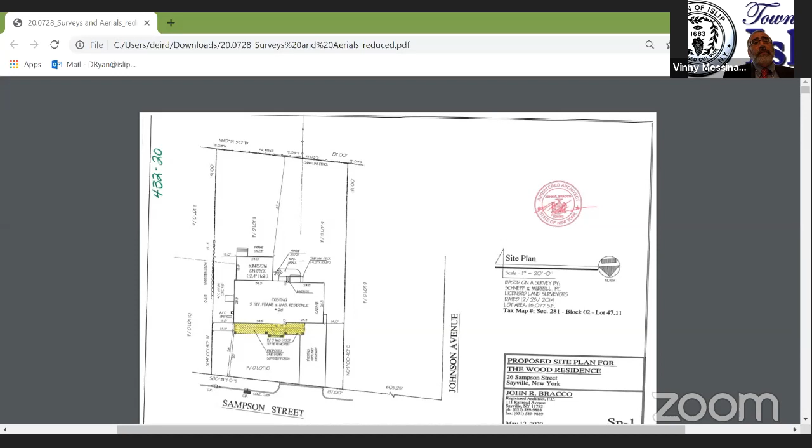All right, is anyone from the public here on this? There being no one, I'll entertain a motion. Anyone? Don't be bashful, don't be shy. Motion. Is there a second? Second. All in favor? Aye. Opposed? None. Application granted.

Thank you. Which other application do you have, Ms. Trella, since you're here? 436-20. All right, we'll call that next then.

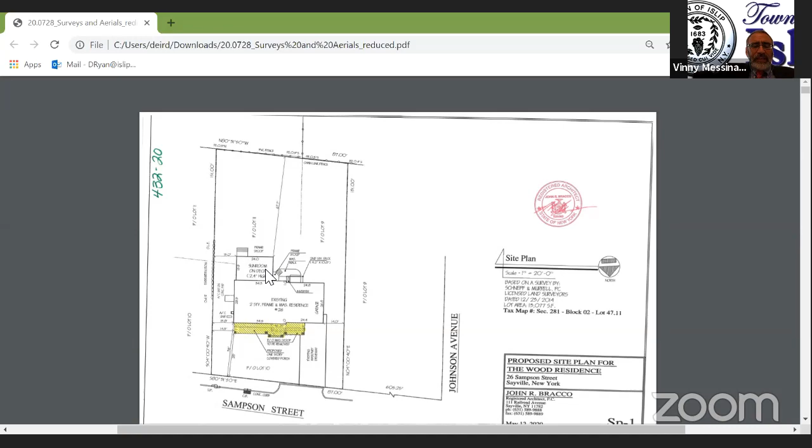436-20, Feliciano A. and Julia Solsa, to renew permit for two-family, family use only, Residence B district, east side of Pine Grove Boulevard, number 1723, 260 feet north of Benton Place, Bay Shore, New York.

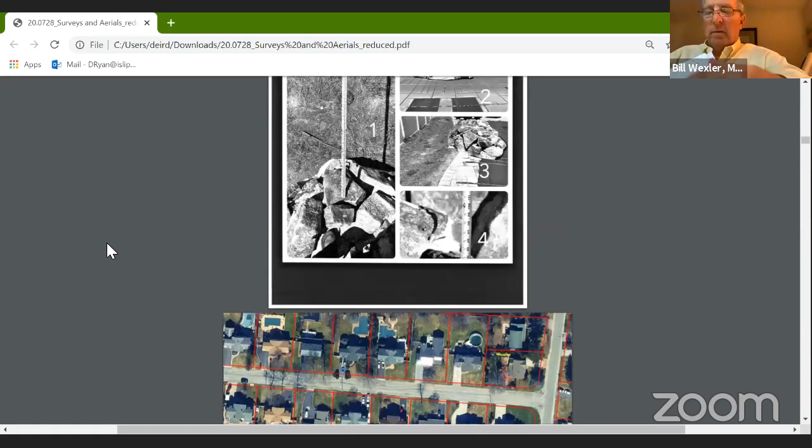Please state your name and address again for the record. Roxanne Trella, Dynamic Expediting, with offices at 1040 Terry Road, Ronkonkoma, New York, agent for the applicant. Thank you very much, the floor is yours. Renew the permit for two-family, family use. It's the same, we did provide a license and it's based on age.

Okay, Ms. Passaro, everything in order? Everything's in order. All right, Mr. Nicolia, would you like to make a— oh, I'm sorry, planning, do you wish to be heard? No. Anyone from the audience wish to be heard? Mr. Nicolia, do you wish to make a motion?

Motion to grant the application for a period of 3 years. Second. Thank you. All in favor? Aye. Opposed? Motion carried unanimously.

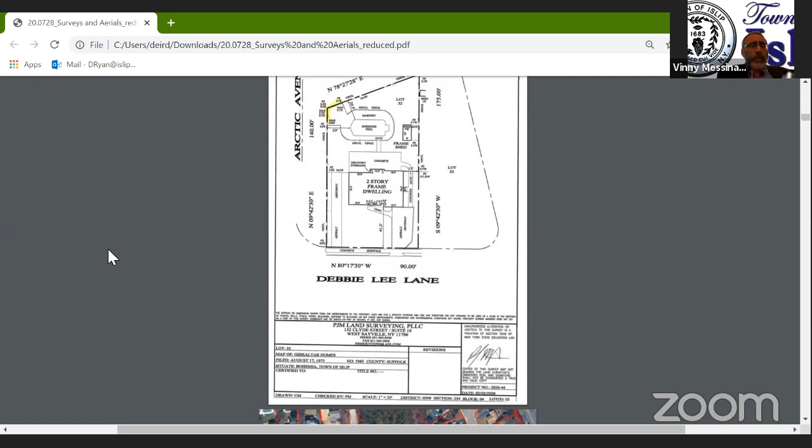Number 435-20, Helene Larson. Permission to leave water feature having a side yard of 6.2 feet instead of the required 14 feet, Residence A District, south side of Hollister Lane, number 16, 270 feet west of St. Mark Lane, Islip, New York. Is there anyone here for the applicant?

Can you hear us, Ms. Larson? She's here. Moved her in. I can't wait for live hearings to resume. I know. Let's see, maybe she's writing to me. Oh, she's writing to me. She's having trouble. We are trying. I saw that. Okay.

Tom from IT is telling us that it looks like maybe you don't have a microphone, Ms. Larson. So what you can do is call us on one of the phone numbers from your house phone. There are 3 phone numbers listed on the town website, right where the Zoom link was listed. When I see a phone number come in, I can convert it to you and move you in as a panelist. Ms. Passaro, which do you prefer, that we second call this or just take the next application and come back to it, or continue to hold for this? I'm just going to ask her real quick. Can you call? Then we'll do a second call. Oh, they're trying, can no longer hear the meeting. All right, we're gonna put this then. We'll recall this when they're back. I'm going to keep communicating with her here.

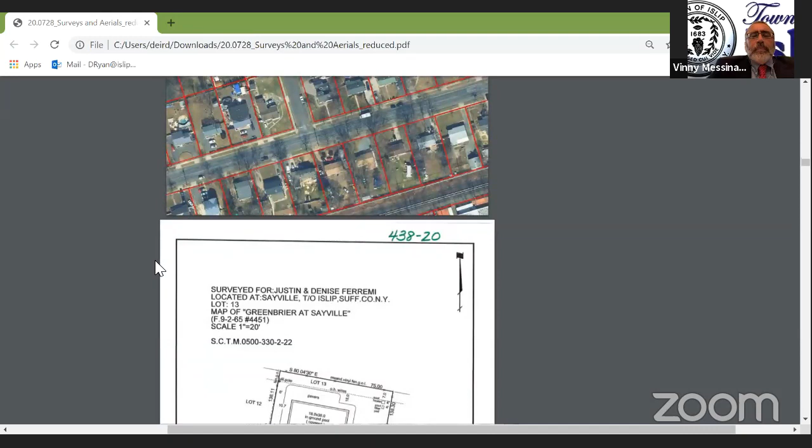Okay, the next application on the top of page 2 has been heard or adjourned. Next application, number 438-20, Justin and Denise Ferremi. Permission to leave patio having a side yard of 1 foot instead of the required 14 feet, Residence B District, north side of Joseph Street, number 73, 445.14 feet west of Lincoln Avenue, Sayville. Is there anyone here for the applicant?

I'm looking, I think I saw that name before. All right, do we not have anyone on this application either? Well, nobody is talking to me in the chat or the Q and A, and I don't see a Justin or a Denise. Fine, second call.

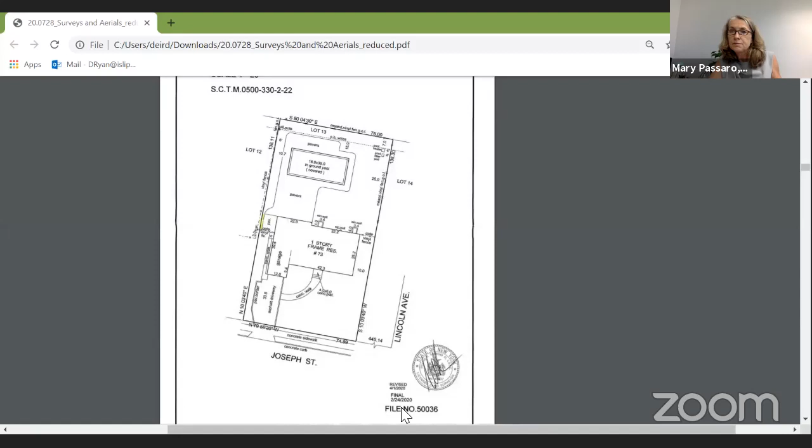Next, application number 439-20, Suffolk Real Estate Solutions, Inc. Permission to alter and repair the roof line, leaving a side yard of 9 feet instead of the required 14 feet, and the total side yards of 24.6 feet instead of required 28 feet. Residence B District, east side of Charter Oaks Avenue, number 147, 225 feet south of Jericho Street in Brentwood. Is there anyone here for the applicant?

He is here. Finally. Hello, can you hear me? All right, sir, state your name and address for the record, please. Michael Mendocino for Suffolk Real Estate Solutions, 20 Beechwood Drive, Manorville, New York, 11949.

All right, sir, are you a principal or a member of the company, or do you have a title with the company? Sole Principal President. Thank you so much, sir. All right, anything you would like to say about your application? I'd be glad to give you anything you want to know, and I agree with you, I like to do this in person. I'm not technology savvy, but it's working. All right, there we go.

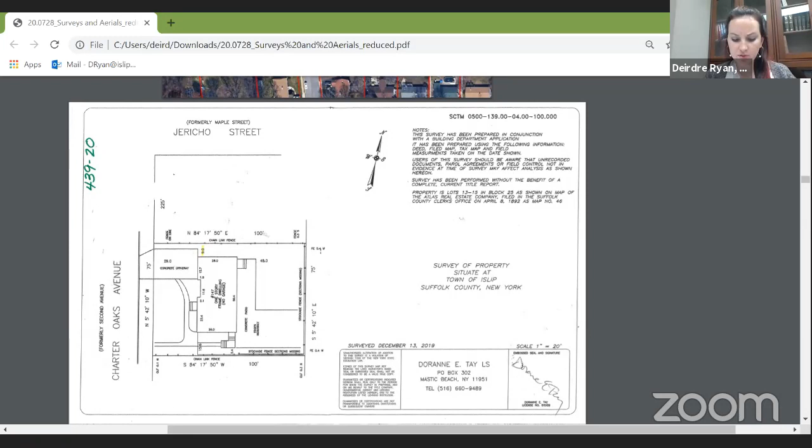Planning, do you wish to be heard on this application? I just had a question. The roof line, I was a little confused by it. Did it always have the 9-foot side yard?

So I thought that might be confusing for you. Nothing changed - if you go to the CO and lines on the survey, they're the same. There was a stop work order when I bought the property as a foreclosure. The people living in the house had a tree that crashed through the garage. Upon buying it, I pulled the tree out, restructured the rear wall for the garage, and evened off the roof line. So there is no actual extension on the property - it just takes the roof line from the beginning of the garage to the house now, so it's even. There is no extension beyond what was already there, just an evening of the roof line, if that makes sense.

All right, having heard that, Ms. Ryan, any other questions? No, that was it, no objections. I just wanted to make sure there was no extension. Sure. Does the board have any questions?

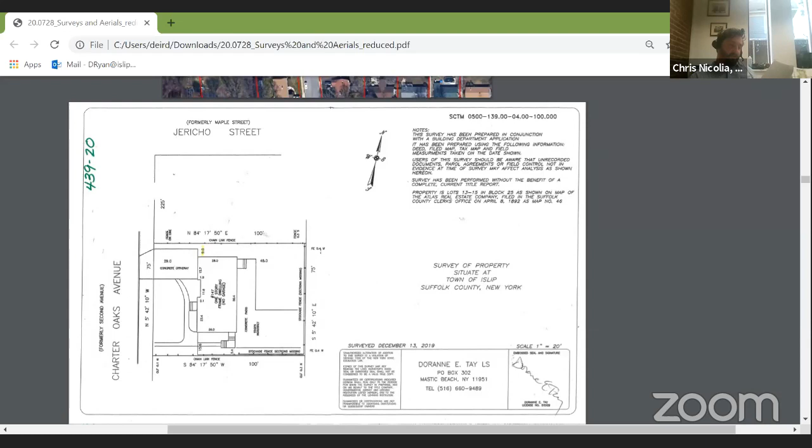Is there anyone from the audience that wishes to be heard on this application? There being none, I'll entertain a motion. Motion to grant the application. Second. All in favor? Aye. All right, application granted. Thank you, sir.

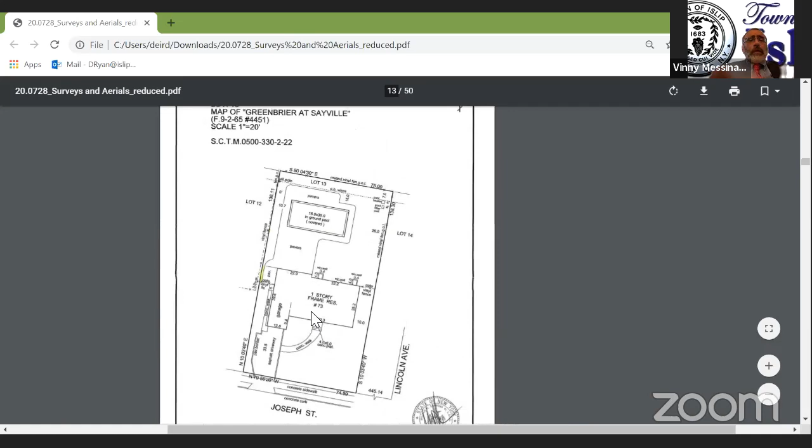Folks, thank you for your time. Do we have anyone back, Ms. Passaro? We do, we have application number 3. The Fishers have arrived. What number is that? 434, okay. This is a recall, application number 434-20, Virginia and Robert Fisher.

I'll read the call again for the convenience of the board members and the public. Permission to leave pool patio having side and rear yard of 0.7 feet instead of the required 6 feet each, Residence AA District, north side of Debbie Lee Lane, number 102, approximately 75 feet east of Arctic Avenue in Bohemia.

Whoever's here for the applicant, name and address for the record, please. Hi, how are you? Virginia Fisher, 102 Debbie Lee Lane, Bohemia.

Okay, if there are two of you in the same room, we're getting feedback, so one of you needs to turn off your computer, or if you're watching live on YouTube, I believe you need to turn that off as well. Okay, there you go, sorry. All right, that's better. I just want to hear every word you have to say, it's all important, so go ahead, anything you'd like to say about your application? Oh wait, did the reporter get her information? I did, thank you. Okay, very good.

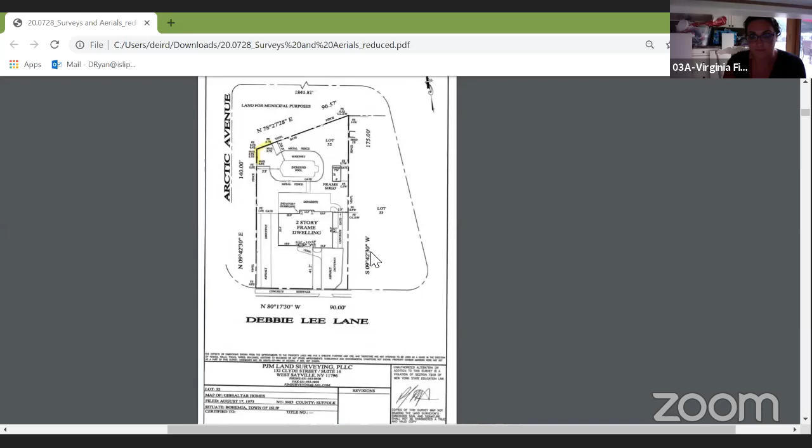Ma'am, anything you'd like to say for your application? No, there isn't. Okay, planning, do you wish to be heard on this application?

This is 434, sorry, I just wanted to check. Correct. So all I want to say about this one is, although it's just in this small corner, it seems very minimal effect. Based on the aerial, it backs up against Town of Islip owned property, so there's not a neighbor there that might be affected by it. That's pretty much it, no objections.

Does the board have any questions? Hearing none, is there anyone in the audience who wishes to be heard on this application? All right, there being none, I'll entertain a motion. I'll make a motion that we grant the application. Second. All in favor? Aye. Opposed? None. Application granted.

Thank you very much, Ms. Fisher. Have a great day. You're very welcome. Bye.

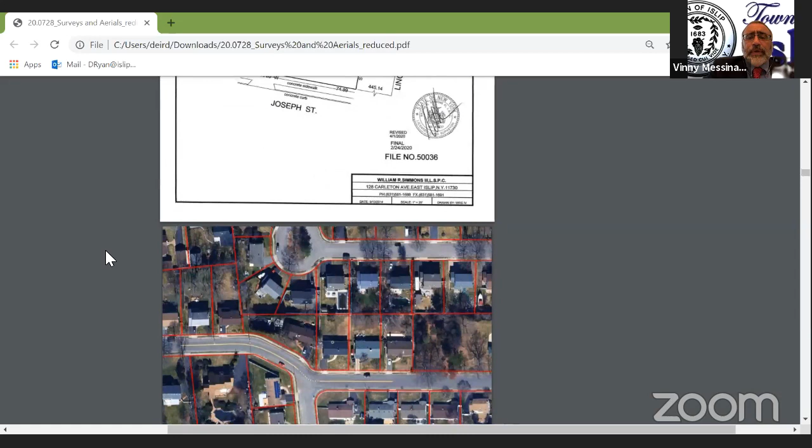Next application, number 440-20, Robert LaMonica, permission to leave deck 2.8 feet high, having a second front yard of 40.21 feet instead of the required 50 feet, and to leave the accessory structure 6.4 feet by 8.8 feet, having a second front yard of 37.21 feet instead of the required 55 feet. Residence AAA District, 278 Cluster, south side of Blue Point Road, number 216, corner of Bayview Drive, Oakdale, New York.

Is anyone here for the applicant? Oh sorry, I was busy. The other person had arrived also after that person, but let me get LaMonica. Okay, we'll work through it. Okay.

Hi, everyone. Name and address for the record, please. Amy DeVito, Woodhull Expediting, with offices at 1031 Main Street, Port Jefferson, New York.

Thank you, Ms. DeVito, the floor is yours. Good evening, Mr. Chairman and members of the board. The only thing I'd like to add to this application is that although these structures do encroach in the front yard, they are fairly far away from the street and not creating any obstruction.

I'm sorry, you're going to have to repeat that, we had some interference there. I heard you, apologize. It's okay.

I said the only thing I wanted to add was that although these structures are located in the second front yard, they are substantially far away from the street and any moving traffic, not creating any obstruction to moving traffic. The house was built as part of the cluster and was actually one of the smaller lots, so it doesn't leave much room due to its unique lot shape to put really anything in the backyard without encroaching. I did speak to Deirdre earlier, and I know that she did find a comp just across the intersection to the north of this property with very similar relief, actually more intense relief than this. I'm happy to answer any questions.

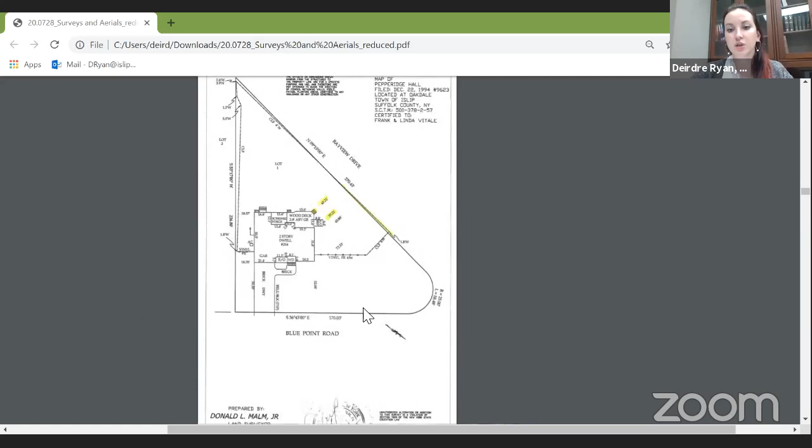Just like Ms. DeVito said, there's a precedent for a second front yard of 21.5 and a stoop having a second front yard of 20 feet. So this doesn't seem like it's a great impact on the neighborhood. It seems like it'd be fine. And again, the lot shape is very strange, even on the aerial it's just a strange area. So no objections.

All right, thank you. Anyone in the audience wish to be heard on this application? There being none, Mr. Sullivan, I'll entertain a motion. I'll make a motion to grant the application. Is there a second? Second. All in favor? Aye. Opposed, none. So carried, congratulations, application granted.

Thank you very much. Thank you. I'm here for the next case too. Oh, look at that. Would you mind if we go back and get the simple one we skipped over in the beginning? Sure. And Mary, Ray Snyder from Fusion Architecture is here with me. Thank you, good to know. Okay, all right, we'll get right back to you then.

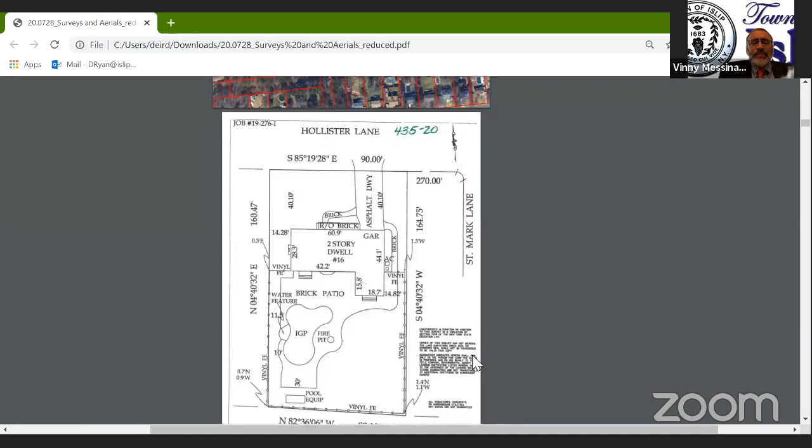Which application would you like to recall? That is the application of Helene Larson, number 435-20. All right, I'll recall it. Number 435-20, Helene Larson, permission to leave a water feature having a side yard of 6.2 feet instead of the required 14 feet, Residence A District, south side of Hollister Lane, number 16, 270 feet west of St. Mark Lane, Islip. Is there anyone here for the applicant?

I promoted her to panelist. All right, I'm asking her to start the video. Ms. Larson, the floor is yours. Ms. Larson? Let's see, Ms. Larson's on the phone. Ms. Passaro, can you patch her in? Oh, I wonder if she's here.

I'm on mute. Oh, I think we have her. All right, Ms. Larson, good evening everybody. Hello, how are you? Helene Larson, finally. Yes, finally. You state your name and address for the record, please. Good evening, I am Helene Larson, my address is 16 Hollister Lane, Islip, New York.

All right, thank you so much. Is there anything that you'd like to say about your application? Not really, just we'd like to leave our water feature.

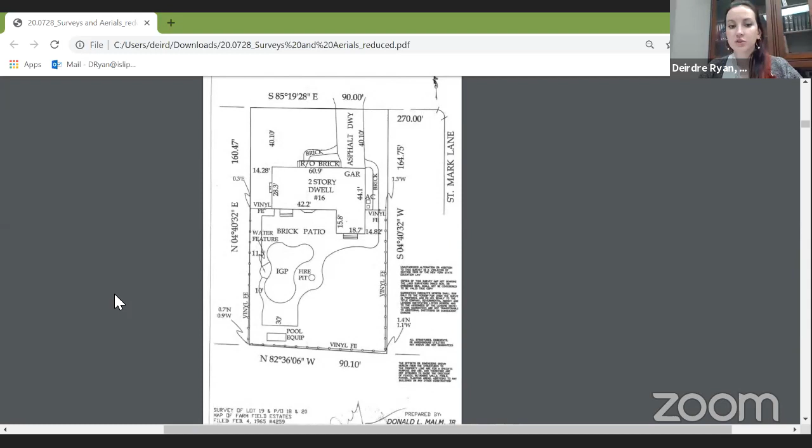No objections. It bumps out a little bit at a small area, and it seems like the height is minimal as well. Okay, does the board have any questions? There being none, does anyone in the audience wish to be heard on this application? There being none, Mr. Wexler, I'll entertain a motion.

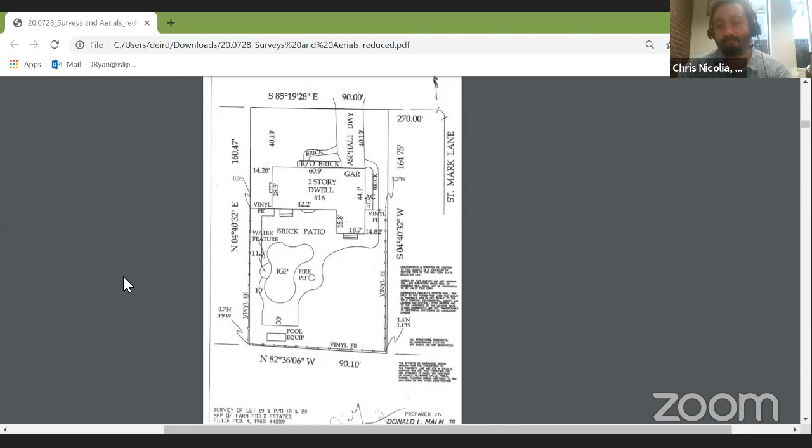Thank you, Mr. Vice Chairman. I make a motion that we grant the application. Second. All in favor? Aye. Opposed? Application granted. Thank you, Ms. Larson, and thank you for your diligence in trying so hard. Thank you, guys, have a great day. You too.

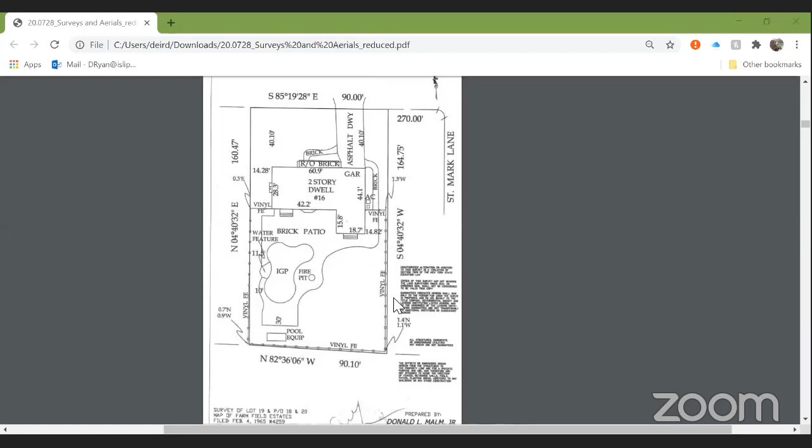Okay, so now we're back to application number 441-20 on page 2 for the board's convenience of the agenda. Town of Islip Community Development Agency, United Way of Long Island, permission to erect a one-story dwelling with a porch on a lot having a width of 50 feet instead of the required 75 feet, lot area of 6,231 square feet instead of the required 7,500 square feet, leaving side yards of 12 feet and 11.85 each instead of required 14 feet each.

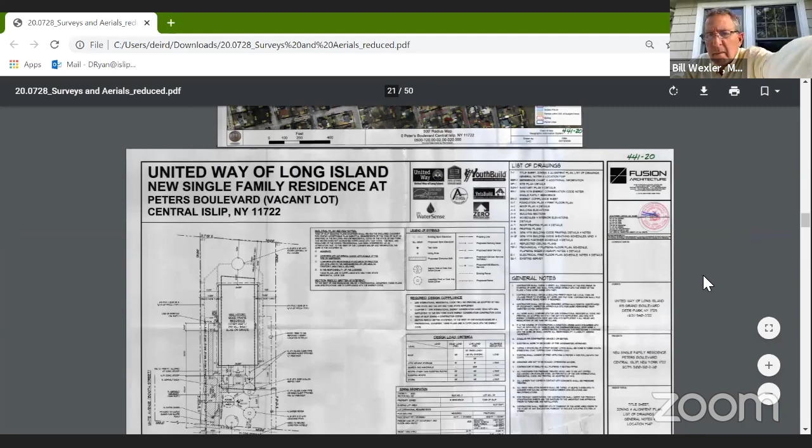Total side yards of 23.85 feet instead of the required 28 feet to erect a portico, leaving a side yard of 9.5 feet instead of required 14 feet. Residence B District, east side of Peters Boulevard, approximately 200 feet south of Booth Street, Central Islip, New York.

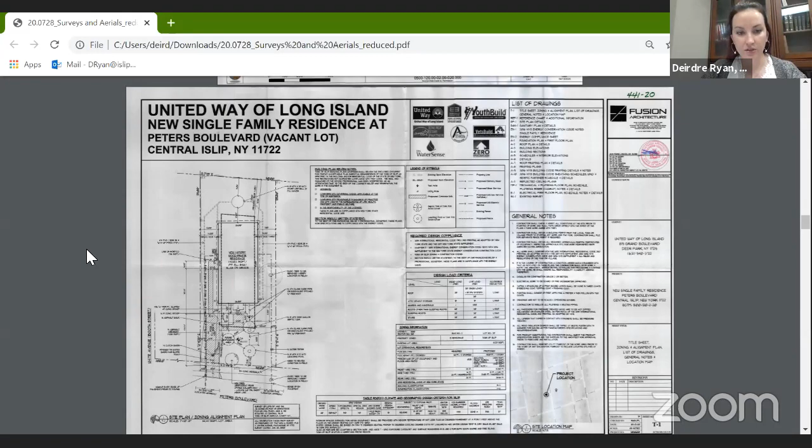And there's a lot of 2-story dwellings in this area as well that ask for a side yard of 10 feet. This is a 1-story dwelling, so I think it won't impact the site as much. I did actually look into the map that they supplied, showing the radius and the 87 homes or parcels mentioned. Sorry, you're breaking up on us, Ms. Ryan. Hello? There you go. Okay.

Out of the 87 parcels within the 500-foot radius, 19 are actually 50-foot lots, so that's about 22%, I think, when I did the math. And even ones that are below 75 feet, there's about 30% of the lots in the area that are below 75. So I believe this would be more so in the nature and character of the neighborhood. Okay, and planning supports the application.

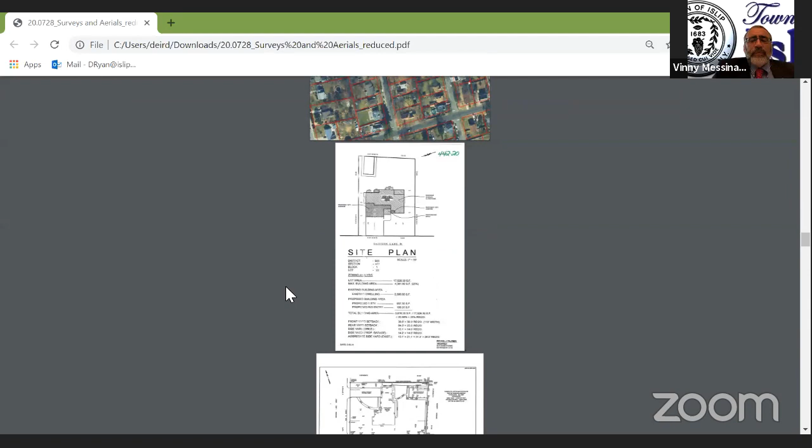Next, application number 442-20, Elizabeth A. Feeney and Kathleen A. Gleason. Permission to erect addition and alterations to dwelling resulting in a new structure, leaving a side yard of 10.1 feet instead of the required 14 feet. Residence A District, east side of Davison Lane West, number 7, 140 feet north of the terminus of Davison Lane West, West Islip, New York.

Is anyone here for the applicant? The applicant has been promoted to panelist. There they are, oh good. You have your architect with you? Yes, great. Good, I couldn't find you in the attendee panel, Michael. Thank you. That's the finest looking group we've had so far. Thank you very much. Thank you.

Please put all of your names and addresses in for the record, please. Michael Palumbo, architect, 80 Elizabeth Drive, Bethpage, New York, 11714. Could you spell your last name for me, please sir? Palumbo. Thank you, next. Elizabeth Feeney, 7 Davison Lane West in West Islip, 11795. Thank you, next. Kathleen Gleason, same address, West Islip, 7 Davison Lane West.

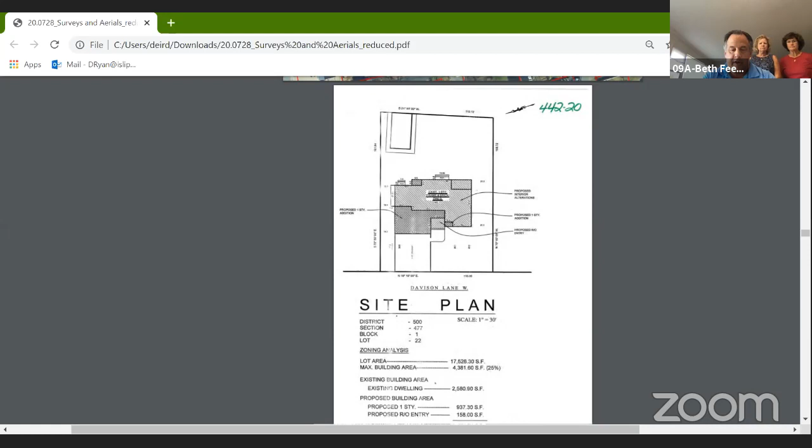Thank you very much, Mr. Palumbo, the floor is yours sir. Thank you, Mr. Chairman, members of the board, good evening. I'm appearing on behalf of Elizabeth Feeney and Kathleen Gleason of 7 Davison Lane West, West Islip, New York. We're requesting a variance to construct an addition and interior alterations to the existing dwelling, which is located in the Residence A zoning district. The proposed additions and alterations result in a new structure by definition and leave an existing side yard of 10.1 feet where 14 feet is required.

As you can see, the proposed garage addition complies with the required minimum side yard setback of 14 feet. We are asking for relief of the existing non-conforming portion of the dwelling that exists. The proposed addition will comply with the required setbacks. I know the board is familiar with this area. There are several properties along Davison Lane West that have been expanded and improved. Elizabeth Feeney and Kathleen Gleason recently purchased this property, and they're simply seeking to make improvements to the existing dwelling and property. Prior to this evening's hearing, they discussed their application with the surrounding property owners, and there were no objections. The proposed alterations will be consistent with the character of the neighborhood, and that completes our application.

Thank you very much, sir. Are there any questions from the board at this time? Mr. Chairman, I have a question regarding precedent. What do we have that's same or similar with 10.1? As usual, Mr. Chairman Emeritus, good anticipatory instinct. Ms. Ryan, could you educate us, please?

I was able to find a few precedents. There's at least 3 that have the same side yard of 10 feet, another with a side yard of 10.1, and another with a side of 10.2. So this does seem in character. Does that answer your question, Mr. Wexler? It does, Mr. Okay.

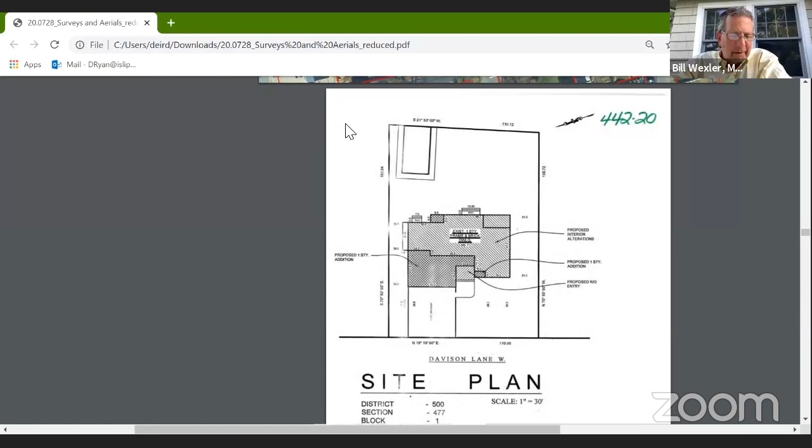All right, thank you very much. Does anyone else have any questions? Is there anyone from the audience that wishes to be heard on this application? There being none, Mr. Wexler, I would defer to you for the purposes of making a motion. Thank you, Mr. Vice Chairman. I'll make a motion that we grant the application. Second. All in favor? Aye. Opposed? None. Application granted. Thank you very much. Have a wonderful evening. Thank you. Thank you for your time. You're very welcome.

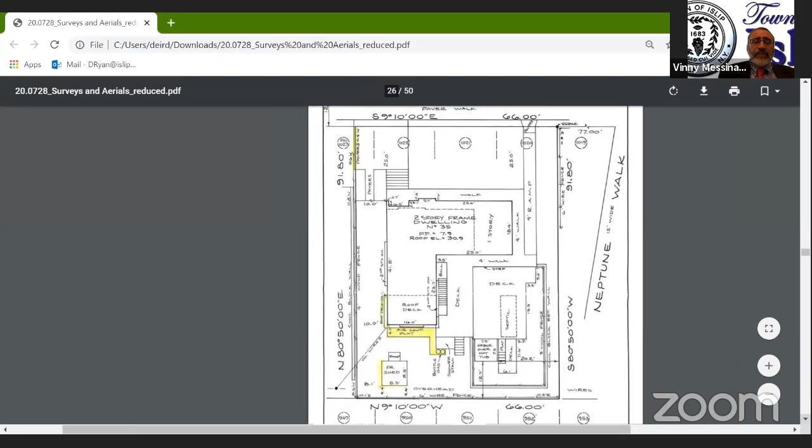Next application, number 443-20, Richard and Lorene Seguelia. Permission to leave a shed 8.3 feet by 8.3 feet, having a rear yard of 4.4 feet and a side yard of 8.1 feet instead of the required 10 feet each. To leave a roof deck, creating floor area ratio of 32.45%. Roof line of roof deck having a side yard of 9 feet instead of the required 10 feet. To leave AC and propane platform over 48 inches in height, having a side yard of 10 feet and rear yard of 14.5 feet instead of the required 15 feet each. To leave front pavers having a side yard of 0.6 feet instead of the required 4 feet. Residence BAA District, west side of Gale Avenue, number 35, 77 feet north of Neptune Walk, Seaview. Is there anyone here for the applicant?

Ms. Fay, there you are. Hi, how are you? Good evening. Mr. Chairman, members of the board, Christine Fay here. It says, which application are you being heard on? That wasn't you. Anyway, good evening, Mr. Chairman.

This is Christine Fay from Accurate Expediting Offices, 286A Belmont Avenue, West Babylon, New York. Mr. Seguelia, my client is seeking permission to leave his shed, roof deck, AC and propane platform, and front pavers. They are in the process of selling the home, and they hired me to rectify these issues. All the structures are existing and are in nature and character of the Fire Island homes. We would like the board to consider approving this application.

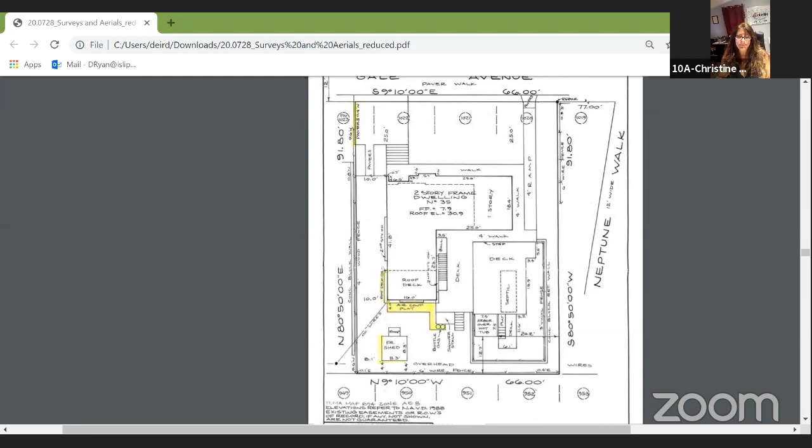Thank you. Any questions from the board? I do, Mr. Chairman. What concerns me is the shed. What do we have as precedent? Since it's 4.4 instead of 10, that's significant.

Ms. Ryan, can you help Mr. Wexler and I? I wasn't able to find a shed with a rear yard of 4.4, but there were a few sheds granted at 6 feet and 6.9. All right.

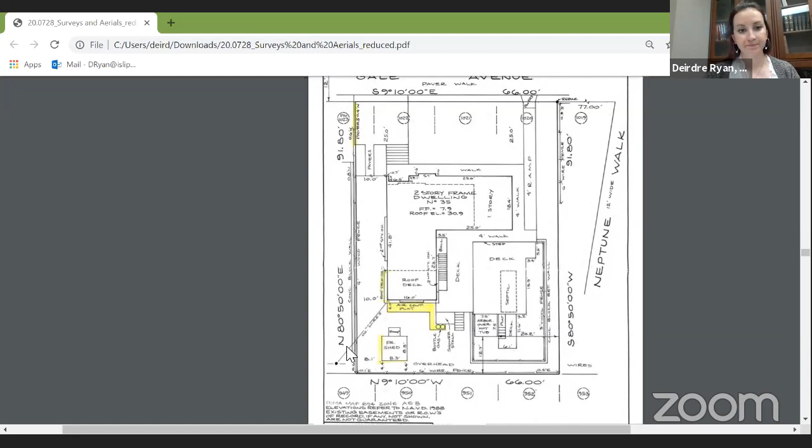Okay. Since we have precedent of 6 feet, why don't we give them 6 feet? Because if we go down to 4.4, before you know it, we're on the property line. Mr. Wexler, however you wish to frame it in the form of a motion is fine by me. And I'll give you the opportunity to do that if no one in the public wishes to be heard. There being no one else, Mr. Wexler, I'll defer to you for purposes of making a motion.

Thank you. I will make a motion that we deny so much of the application seeking to leave a shed having a rear yard of 4.4 feet and side yard of 8.1 feet, and grant the applicant 6 feet, and grant the remainder of the application. Thank you very much for that well-crafted motion. Do I have a second? Second. All in favor? Aye. Opposed? None. Application granted as modified.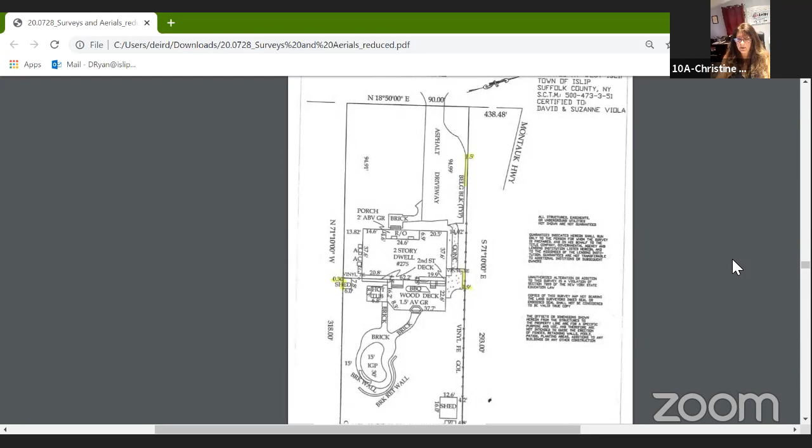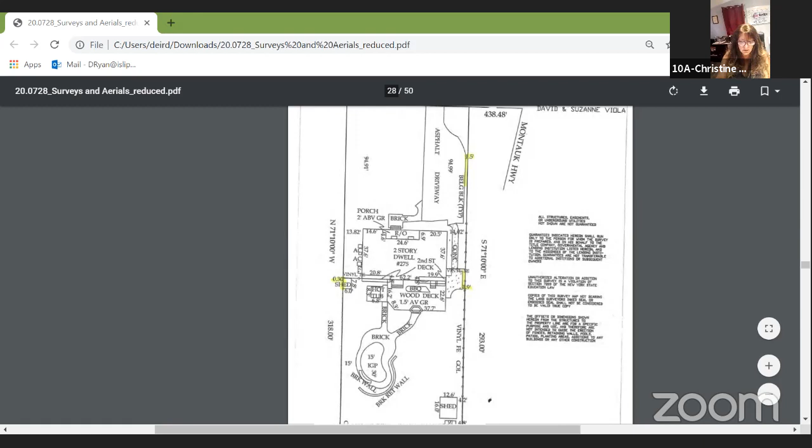The Violas are seeking permission, as you stated. Their house is in contract for sale. We started this process of legalization before the house actually went on the market, and now they're in contract. The driveway was installed in 2009. They didn't know there was a setback requirement. The shed was installed in 2012, a small shed, 6 by 7.8. The deck in the rear is back to the canal, built in 2010, again not knowing there was a setback requirement. We'd like the board to consider approving this application.

Okay, there seems to be a lot about the town code your clients don't know, huh? We don't. Any questions from the board? There being none, Ms. Ryan, do you wish to be heard? No objections. All right, thank you. Does anyone in the audience wish to be heard? There being none, Mr. Wexler, since you're on a roll.

Thank you, Mr. Chairman. I'll make a motion that we grant the application. Second. All in favor? Aye. Opposed? None. Application granted.

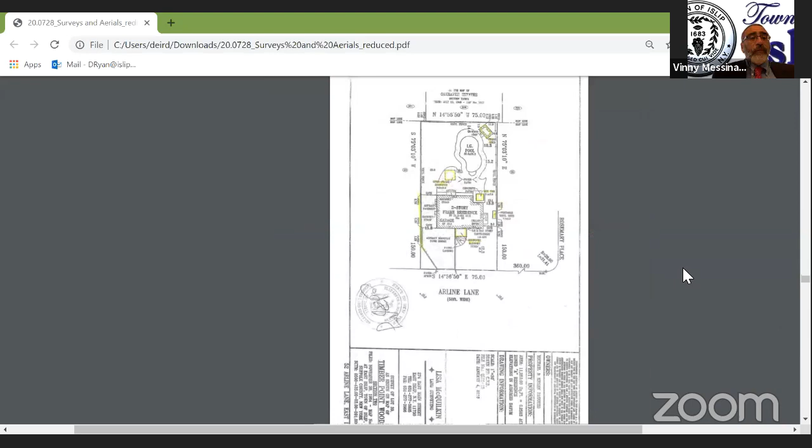Number 445-20, Michael and Megan Regusio, permission to leave a roofed-over entrance having a front yard of 33 feet instead of the permitted encroachment setback of 34 feet. Shed not having 20 feet behind the front line of the dwelling, and a side yard of 1.3 feet instead of the required 2 feet. Hot tub having a side yard of 13.1 feet instead of the required 14 feet and building separation of 2 feet instead of the required 6 feet. And a driveway having a side yard of 0.7 feet instead of the required 4 feet. Residence A District, west side of Arline Lane, number 52, 360 feet south of Rosemary Place, East Islip.

Is there anyone here for the applicant? Hi, Megan Regusio, property owner, 52 Arline Lane in East Islip. All right. Is there anything you'd like to tell us about your application? No.

All right, how old is the shed and how did it get there? Okay, let me get my husband on here. Go ahead. Hi, how are you doing? Mike Regusio, 52 Arline Lane. Okay, the shed's been there probably 14 years, maybe since we did the pool. The guys that did the pool kind of rotated it with the pool. So it was straight, but if you could see, it's like on an angle. Yeah, no, I see. Yeah, yeah.

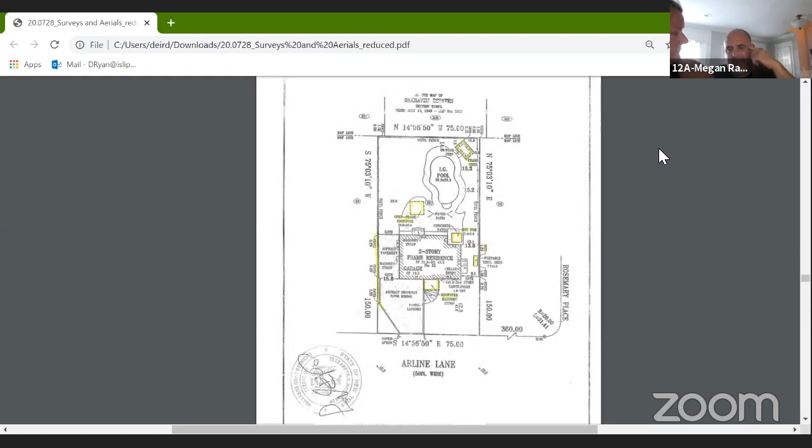Does the board have any questions? Yes, Mr. Chairman. My query is, we've been holding pretty firmly on these setbacks, and we don't want to create a precedent that we're going to have to live with. When we thought 7 by 7 by 3, it was of small moment, but I think we're going to have to seek compliance. Otherwise, we're going to have this come up, and this is West Islip.

East Islip, we're going to have this come up quite often. I don't think the height is the problem here, it's the shed, as I understand it. Is that your understanding as well, Mr. Wexler? Yes. Okay, Planning, anything else to say? No, that's it. The only objection is for the shed.

Is there anyone in the audience who wishes to be heard on this application? There being none, Mr. Wexler, I'll entertain a motion. Thank you, Mr. Chairman. I'll make a motion that we deny so much of the application requesting to leave the shed not having 20 feet behind the front line of the dwelling, and grant the remainder of the application.

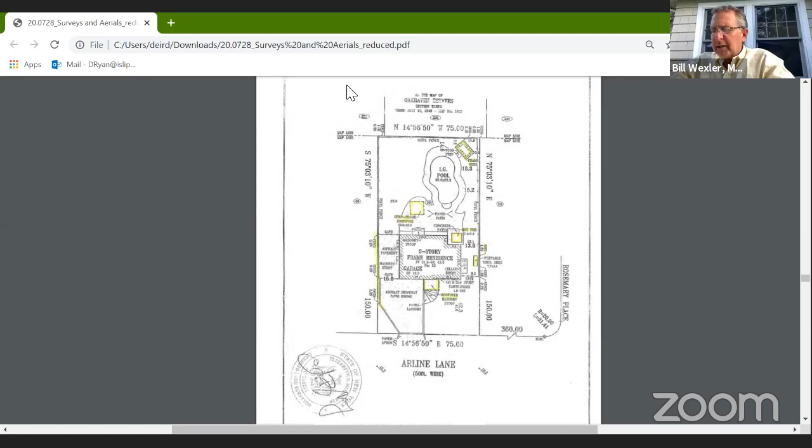Is there a second? Second. All in favor? Aye. Aye. Anyone opposed? None. Thank you very much. Your application's been granted with the exception of the shed. You're going to have to move that to a compliant location, okay?

Okay, thank you very much. Thank you so very much. Have a wonderful evening. You too. Have a great. All right.

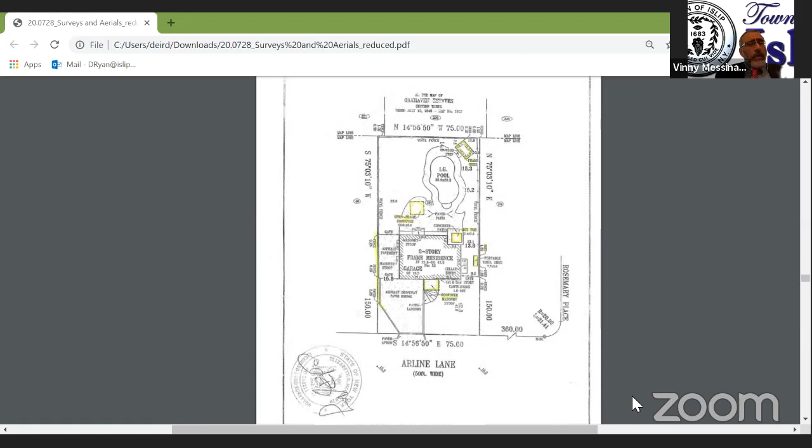Next application, number 446-20, Maureen and Joseph Frazetta. Permission to use dwelling for family use only, as per Islip Town Code Section 68-419.1, Residence A District, east side of Sequams Lane East, number 105, 748.6 feet north of Eaton Lane, West Islip, New York. Is there anyone here for the applicant?

Ms. Pissarro? Unmute yourself, please. Although we did see you nod, we can't hear. Yes, hello? All right, name and address, sir, for the record. 105 Sequams East Lane, West Islip. Okay, and that's the applicant.

Mr. Ang, are you here on this as well? Yeah, that is Frank Frazetta, the son of the owners, Maureen Frazetta. That's right, Mr. Ang, could you put your appearance on the record for us? Christopher Ang, 93 Main Street, West Sayville, New York. We are asking for permission to do a family use only on this dwelling.

Very good, Ms. Pissarro, is all of our paperwork in order on this? Ms. Pissarro, you're muted, Mary. Okay, yes, everything's in order. Frank, I think your parents are 79 and 81 years old, correct? That is correct, actually my dad just turned 82 yesterday. Congratulations! We wish him a happy birthday on behalf of the Town of Islip Zoning Board of Appeals. We greatly appreciate that, thank you.

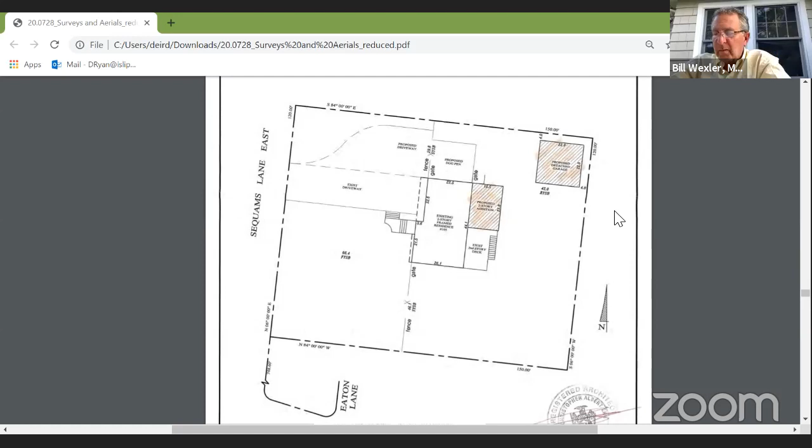Oh, maybe we have sound now. Oh, she's calling me.

I've done this with other towns, and they're not as organized as the town of Islip. Yeah, well, saying that tonight, we don't feel very organized tonight. It usually goes much smoother than this. And we owe all of that to Tom and, of course, the secretary to the board, Ms. Pissarro. They make this work for us, and also our recording secretary, Ms. McGrath. So, thank you all. All right.

Are we getting anything, Ms. Pissarro? Anybody co-hosting with me sees the phone number come in. There we go, I will promote. Perfect, thank you, talking permitted. Good evening. Well, thank you. Success. Now you have to turn off your computer, or mute your computer. No, we're still getting an echo. Go in another room, we don't need to see you, we'll just hear you. How's that? That's wonderful, thank you.

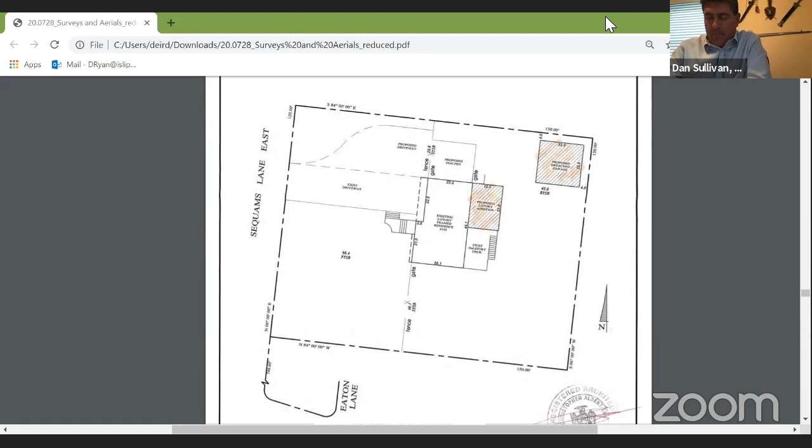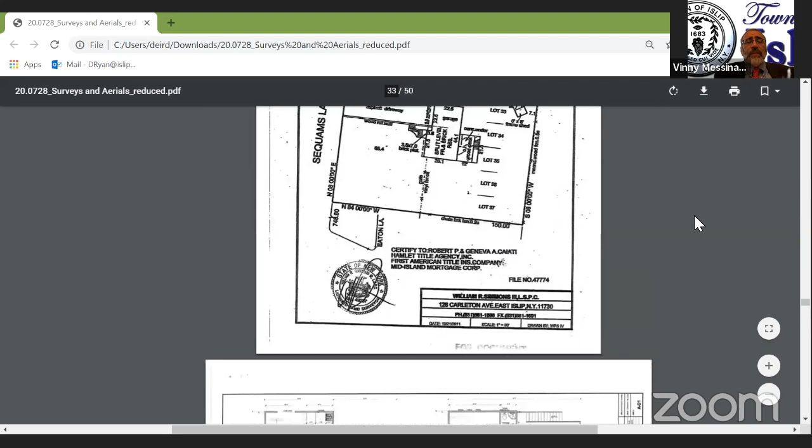All right, number 447-20, Kiernan and Nicole Tracy, permission to install an in-ground pool, leaving a front yard of 28 feet instead of the required 29 feet, and a side yard of 7 feet instead of the required 14 feet, to leave a hot tub having a rear yard of 7 feet instead of the required 14 feet, Residence B District, northeast corner of McNeill Street, number 215, and Seville Boulevard, Sayville, New York.

Is there anyone here for the applicant? He's here. And that's Mr. Booth, it says. Mr. Booth, you have to unmute your microphone.

How's that? There we go.

All right, Mr. Booth, do you wish to be heard on this application? First name and address for the record, and then the floor is yours, sir. Peter Booth, 5 Kirk Avenue, Ronkonkoma, New York.

Anything you wish to say in support of the application? Yeah, I just wanted to mention, Mr. Kieran is going for the 7-foot side yard. But in checking with the town, the next door neighbor had been granted an 8-foot setback. So in discussing that with the homeowner, he is willing to move the pool closer to the home, giving me a 7-foot separation from the house, therefore giving me the 8-foot.

Okay, but this 7-foot is just one corner. It seems like some way up, it then expands to 8 and then further to 10 and then further to 11. Is that right? That's correct. All right, so at the closest point to the side yard there. Understood, okay. Does the board have any questions for Mr. Booth?

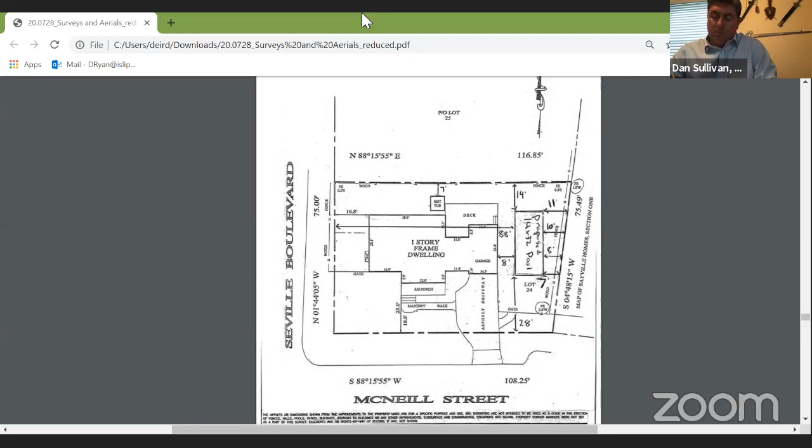Any other questions from the board? All right, is there anyone in the audience who wishes to be heard on this application? There being no one, Mr. Sullivan, I'll entertain a motion. Thank you, Mr. Vice Chairman. I'll make a motion to grant the application. Is there a second? Second. All in favor? Aye. Opposed? None. Thank you, Mr. Booth, have a good evening. Application granted.

Next application, number 448-20, 166 River Road Corp. Permission to establish a non-conforming use of a single-family dwelling in an Industrial 1 district and to leave addition to dwelling, resulting in less than 25% expansion of non-conforming use, Industrial 1 district, northeast corner of Penataquit Avenue, number 67, and Lockwood Road, Bayshore, New York.

Is there anyone here for the applicant? There is. Can you hear us, Mr. Cortazar? We also have a Kathy Sacamano. We do, all right, yes. Good evening, we're neighbors at 14 Lockwood Road, and we didn't understand the application. Okay, we'll get to you in a second. We'll get to you, ma'am, just give us a second. We're all kind of working through this together.

All right, we had the applicant, there's Mr. Cortazar. Yes, sir. All right sir, do you, name and address for the record please, and then the floor is yours. Yes, Vincent Cortazar, 6 Carmen Road, Dix Hills, New York. Okay, are you an officer of 166 River? Sole owner of 166 River Road. Thank you sir, okay. Anything you'd like to tell us about your application, sir?

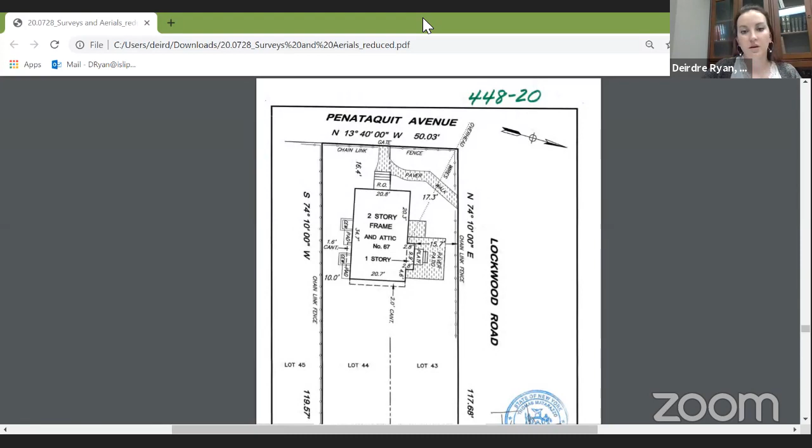Okay, Ms. Ryan, your input will be especially valuable to the board tonight, so can you educate us a little bit? So in this area, there's a lot of houses that are establishing nonconformity because they are Industrial 1. There's a lot of 2-family dwellings that were actually established legal nonconforming use in the area as well. I wasn't able to find the single family, but there were single family uses that were expanded by the same amount, so it does kind of seem, although it might be a bit odd of an area, and I could show you the aerial, there are houses, and this house kind of has been there. Okay, so did this previously enjoy a non-conforming use for a single-family home?

I believe it did, but I forgot to print it out. Ms. Pissarro, do you have the certificate of occupancy? I do. Does it mention anything about the previous non-conforming use? It does, very clearly. Of course, at the time it wasn't a non-conforming use when it was first CO'd. It received a certificate of compliance stating the structure was built approximately 1918, and received that certificate on January 13th, 1981.

Always one step ahead of me, Ms. Pissarro, thank you. It then got a series of rental permits, and for some reason there's a questionable statement on the CO that said it had lost its non-conforming use in an Industrial 1 district, referring to a memo we don't have. There was never another hearing before the board regarding the loss of the non-conforming use, it seems that statement was made without a hearing affirming it.

Very good. Ms. Ryan, is there anything else you wish to add? No, nothing to add. Any questions from the board at this time? There being none, Ms. Sacamano and Mr. Sacamano, I guess the floor is yours.

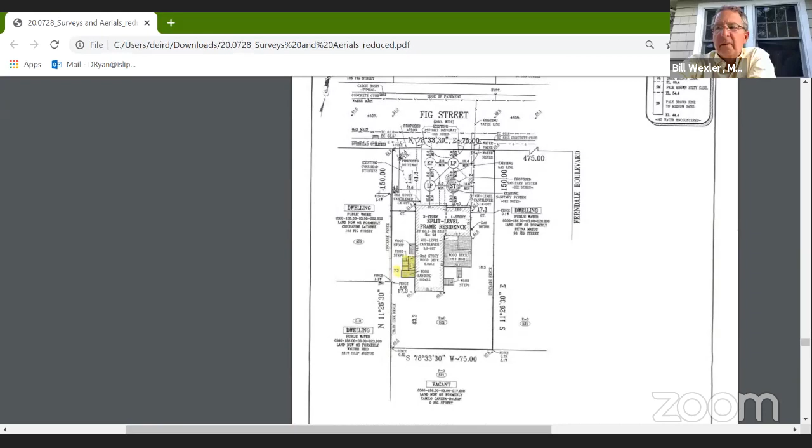My boss, John Mahler, approximately 10 years ago, filed for legalization of this rear yard addition. A variance was granted previously by the board in 2008 for a floor area ratio overage, and the house was carved up into 3 separate apartments. There were plans filed to revert the house back to a single family dwelling. A permit was granted by the building department, and the house was never reverted back to single family.

So where we're at today, it still remains a 3-family as of this date? No, sir. Today it is a single family dwelling. No one lives there, as Camilo would like to rectify the situation and close out all permits first. So when you say rectify the situation, is his intention to use it as a single family residence at this point? Yes, sir. Okay, thank you, I think that's important for the board to know.

Okay, and this is an entrance platform, so it's not a deck. It's really just where the stairs lead to before you enter on the second floor door, right? Yes, sir. All right, I did provide the board with photographs. I'm not sure if you have those, but it's an exterior 2-story wood staircase. Okay, so they're in the file, this is if anyone wishes to see them.

Any questions from the board at this time? No questions from the board.

Ms. Ryan, do you wish to be heard? I just wanted to state there is no precedent, but if the board deems to grant it, I would just request it never be enclosed.

All righty, Mr. Aresta, you heard the request from the planning department. Are you amenable to that? Yes, sir, that is acceptable.

All right, anyone from the audience wish to be heard? Well, we did have a phone call, it was one week ago today, and it was an adjacent property owner, I guess you would say the most impacted property owner on the other side of the staircase. And that person did say that they would be attending this hearing, and yet they're not here.

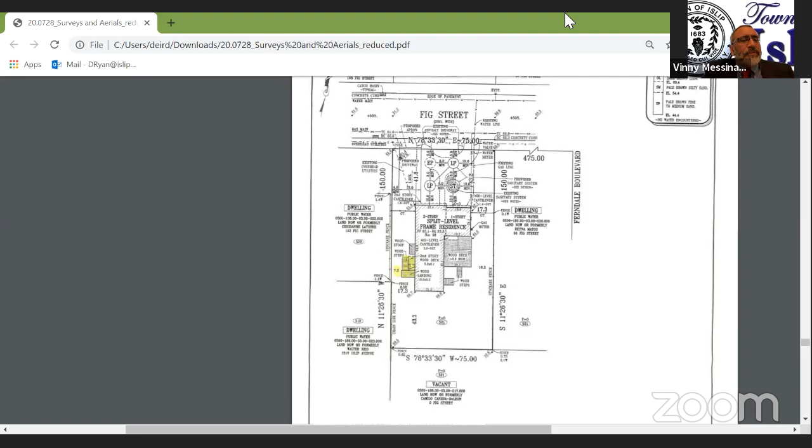Okay, all in favor? Aye. Opposed? None, so carried. Application granted. Thank you, Mr. Aresta. Thank you very much, have a great night. You too. Again, for anyone who missed it before, number 716-19 has been adjourned till August 25th.

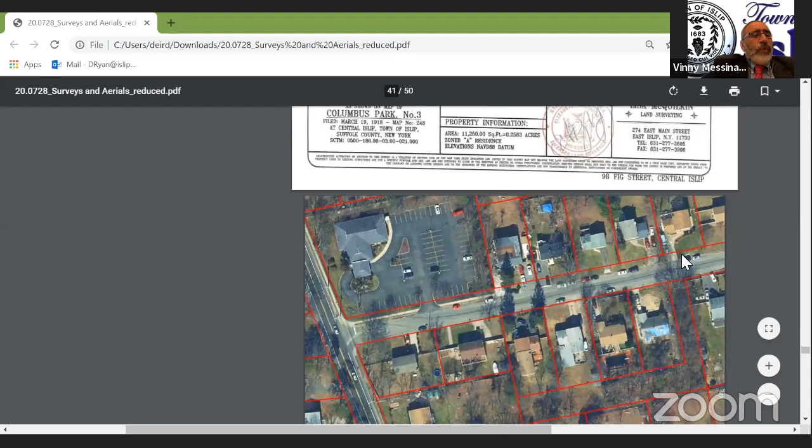Number 451-20, Washing Towels LLC, permission to erect a 2-story dwelling, leaving a rear yard of 24.1 feet instead of the required 25 feet, and floor area ratio of 33.78% instead of permitted 30%. To install a retaining wall 5 feet in height on the property line not having the required setback of 5 feet, and to leave an above ground pool having a front yard of 30.8 feet instead of the required 60 feet. Residence BAA District, northeast corner of Surfview Walk, number 40, and Neptune Walk, Seaview.

Is there anyone here for the applicant? Mr. Graham, good evening. Good evening. How is everybody tonight? Good, good. Your name and address for the record, please. And then I'm going to defer to Mr. Wexler, if you could conduct the remainder of this hearing. Yes, thank you. Thank you. Mr. Graham, go ahead, sir.

Glenn Graham with Graham Associates, 1981 Union Boulevard, Bayshore, New York, representing Alex and Leslie Parker, owners of Washing Towels LLC. Is it possible I could share my screen with the board? I can start with the slide that's up, which identifies in yellow the variances we are seeking, and then I was going to pull up some aerial views of just some pools of the surrounding area.

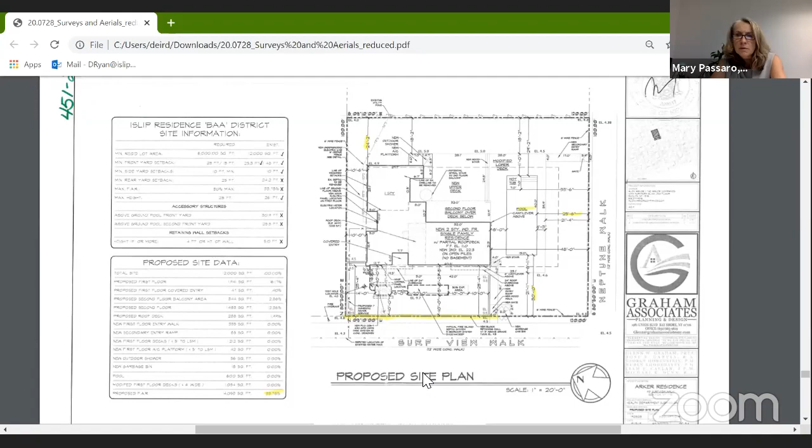Boy, Mr. Graham, you're testing our technological capabilities right off the bat, huh? Since we were the last two, Mary suggested it would be a good time to give it a try. Absolutely, I think I have to promote you, Glenn, to co-host. Okay, Tom, you might have to help us out with this, maybe Tom as the host, information technology. Tom, perhaps you have to promote... any panelist can share a screen, you don't have to make them a co-host. Okay, great, thank you. You guys seeing my screen at this point?

I see Deirdre, now I see Mary. Is anyone seeing my screen at this point? Not yet. Tom, I thought we had this problem early on. Deirdre tried to share and she wasn't a co-host yet, so we couldn't see what she had. No, I have it set that any panelists can share their screen, so you should just be able to click share screen. Here we go, okay, there we go.

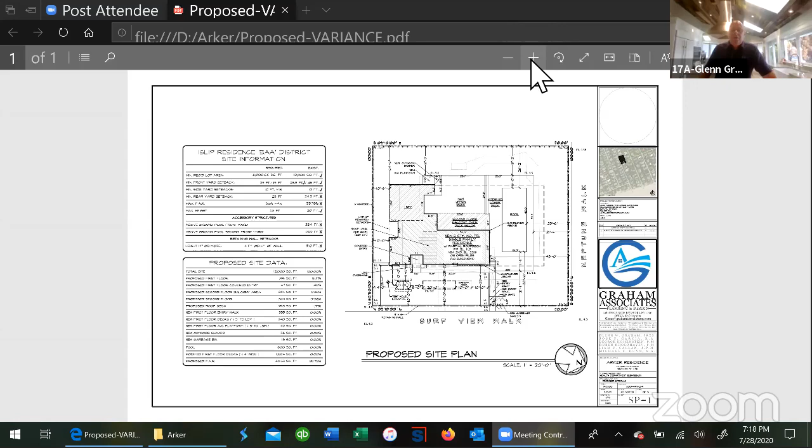So essentially, you're looking at the site plan. I'll zoom in a little bit. The first variance we're seeking is minor in nature: a rear yard setback of 24.2 instead of 25. You'll notice it's just a small portion of the rear of the house. It's an L-shaped dwelling, a new dwelling, but consistent in footprint with the house that is there today.

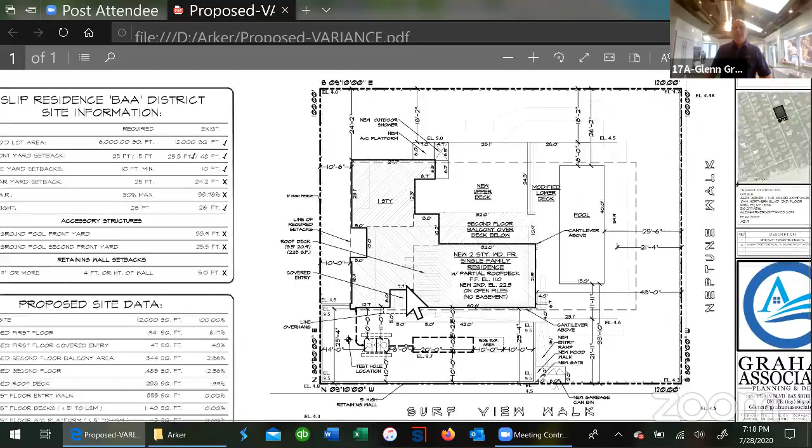The next variance would be a retaining wall for a septic system, along the front property line on Surfview Walk, 5 feet high. However, after speaking with two concerned neighbors, we've looked at doing an advanced septic system, low nitrogen, that will now not need the retaining wall. It will be in the same general area. This is the low nitrogen tank, and this is where the liquids would go. Instead of this large retaining wall, we're going to have two separate fingers extending along Surf View Walk, only about 2 feet out of the ground.

So are you making the application, Mr. Graham, to amend your application to read a retaining wall of 2 feet instead of 5? We're not going to be adding any retaining wall, it's just going to be fill, but I want the board to acknowledge that the septic system will be in that same area.

We can't acknowledge anything, I'm asking you about the application. Your application seeks a setback of 5 feet and an above ground pool, and to install a retaining wall of 5 feet in height on the property line. Are you looking to withdraw that? We're looking to withdraw that, but the wall is part of the septic system we still need to put in. Okay, but if you withdraw it, you won't be able to have a wall, you can't withdraw it and still have it. We're not seeking the wall anymore to appease the neighbors.

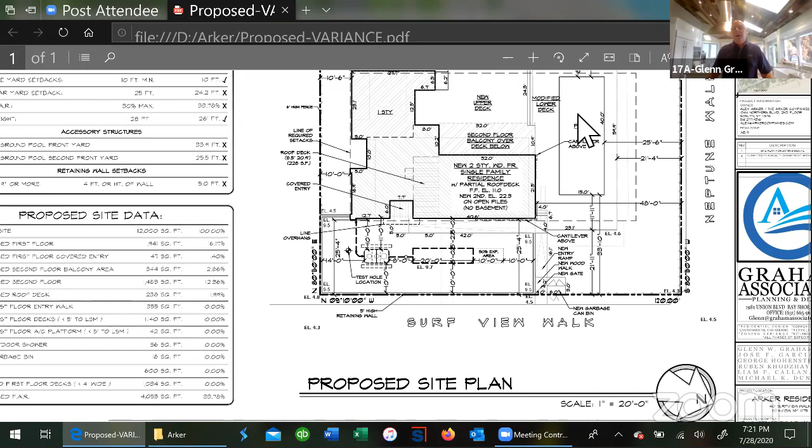Obviously, the next variance is a low FAR variance of 33.78. I think the board can agree we've seen upwards of 40% and higher in Seaview, so it's a relatively low FAR request. And finally, we're back to a swimming pool that has existed for a number of years. I'm going to jump over to my next slide.

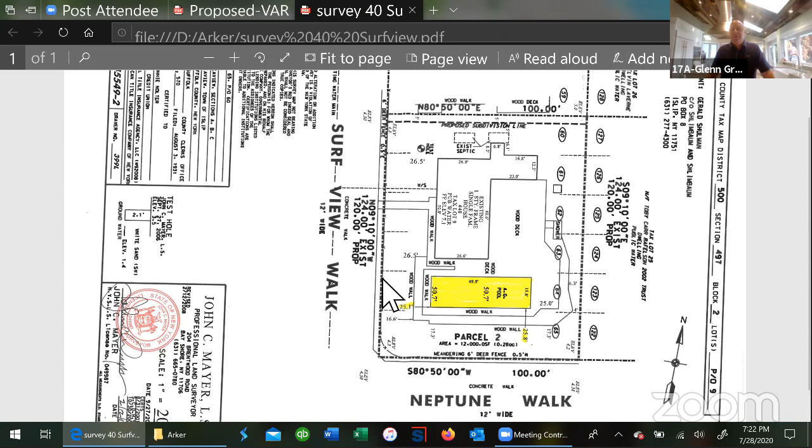Hang on, let me just - I'm sorry, you ran some numbers by me and I couldn't get them down. You wish to amend the application to read what? Give me the wording. We're not amending the application, we're still seeking a setback of 30.8. What I was illustrating in the prior slide is that the pool is 50 feet long currently and 25 feet from the front yard. We're going to shrink the pool, knock off 10 feet of the pool, and increase the setback to 30.8. You may be familiar, in 2018, it's one of the newer applications.

This rule, as the board knows, was from 2016, requiring a new 60-foot setback. There's only been a couple applications granted. The Nelson application 683-18 was granted similar relief at 30.8, so we didn't pull it out of thin air.

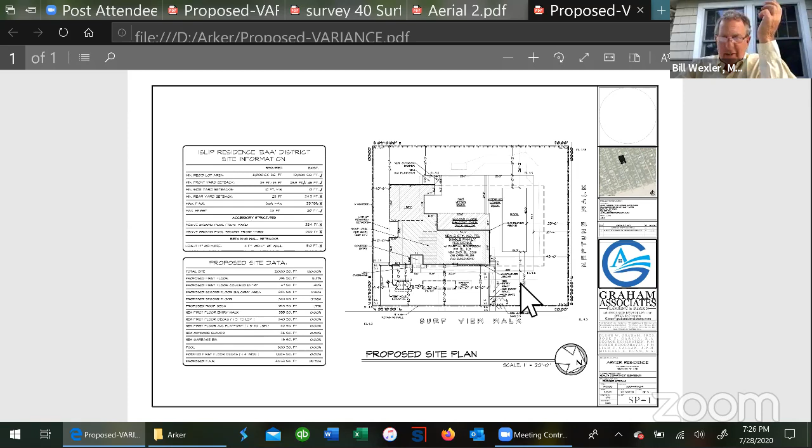Unless I'm sure you must know the case, you brought it up, it's the same. It wasn't on a utility easement, it wasn't facing a ball field. I mean, it's just a straight out similar application. I don't actually know the case. Was it within 500 feet? This is more bayfront, I don't know the exact distance, but it's one of the only two cases heard with this new 60-foot rule.

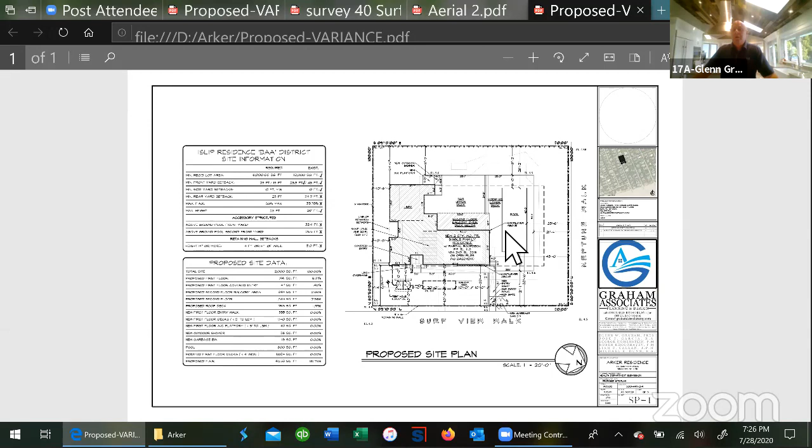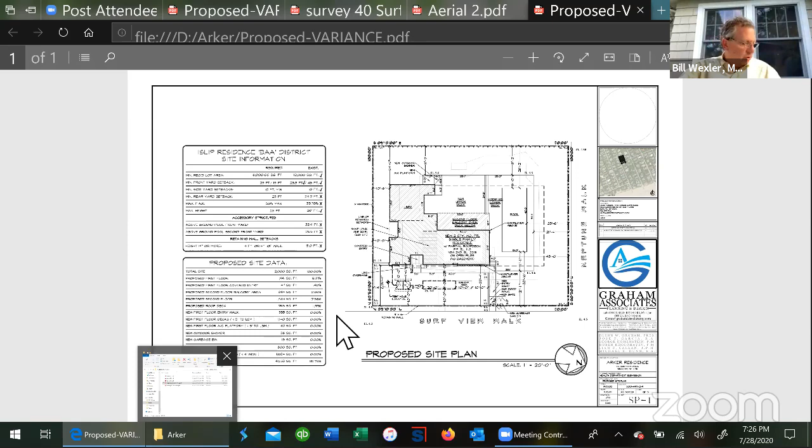We need to find out if it's within 500 feet, because we hew pretty closely to that, otherwise we just keep expanding and the 500-foot rule has no bearing anymore. So we're going to have to look into that unless anybody knows the answer. Let me pull up the aerial view, let's take a closer look.

So let's go ahead. You did it on the Nelson application, the very first one I submitted. But I'm telling the board, it wasn't within 500 feet, but there was no precedent for the Nelson application at all. Well, that's why I want to look into it. I don't know the reason, but you granted it.

The reason being that if we were to put the pool in a more conforming spot, it would be more detrimental to the neighbor. The neighbor on the east side, I could have the pool 25 feet from her yard, the whole 50-foot long pool. We're trying to keep it on a corner that is well screened and enjoys the benefit of Neptune Walk before it even gets to the next door neighbor. We have two neighbors; the one directly impacted, I believe, will speak in favor of the application. She's been living with this pool for the past 20 years. The biggest complaint was that it was a rental house and the noise coming from the pool filter.

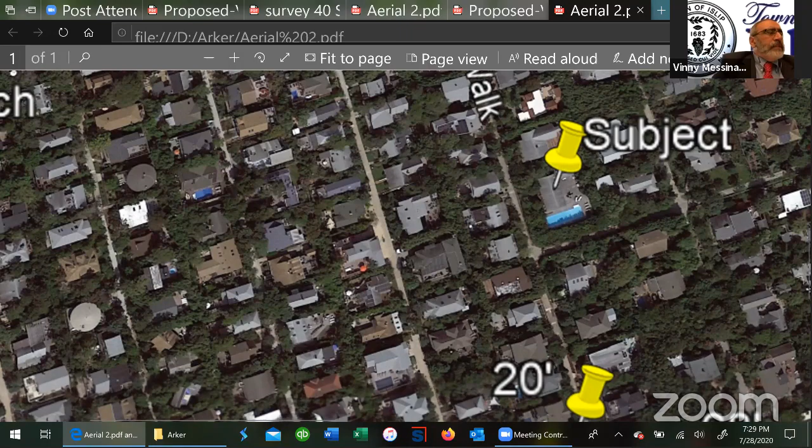So Mr. Graham, what you're saying is that you've taken extraordinary steps to mitigate potential adverse impacts, and that should outweigh the concern about precedent. That's your position, right? Yeah, we're sympathetic to the neighbors, and we've got their support. Okay, that's something the board will have to weigh.

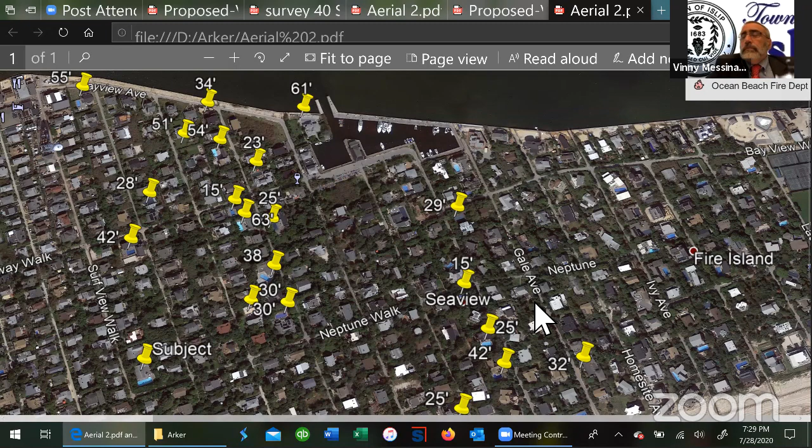That's all. Okay, anything else you'd like to present to us, sir? Just, if you took a close look at this map, there's pools 30 feet all over the place. No, we can see you've done your homework, we see all the thumbtacks.

I just want to remind the board, when I presented the Nelson case, we had strong opposition from a neighbor that didn't want the pool where we were putting it, but if we put it where it was legal, it would have been closer to our house. Yes, you made that point. And I'm going to have the same case here. We're willing to take a 50-foot pool. We are going to cut it down 20% and make it smaller.

We're willing to move it. Wait, it's not that you're willing. You have an illegal structure there, you have an illegal item there. And in your attempt to legalize it, you're going to do certain things to mitigate adverse impact. You're not willing to, you're going to do whatever the board directs you to do, or you're going to challenge the board's decision, but you're not doing us any favors. So please don't say you're willing, because frankly, we're willing to enforce the code strictly.

Why aren't we hearing you, Chris? Understood. All right, thank you.

Anything else you would like to present to the board, sir? Not at this time. You're not willing? A little joke, little levity.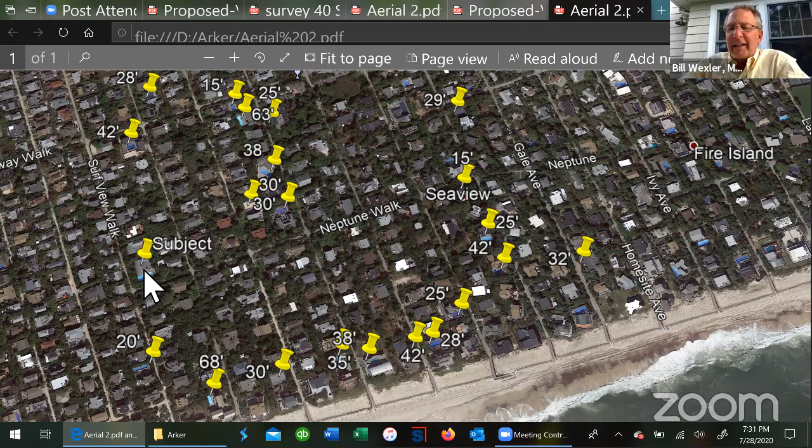Okay, as you have nothing else to add, does any questions from the members of the board? Any questions from members of the public? Yes, I would like to speak. Yes ma'am, just give us your name and address please.

I'm Martha Mason, at 42 Surfview Walk in Seaview. I'm the above referenced neighbor, and I was very against this variance to begin with, but I've met with both the architect and the owners, and I highly support their application in that they're going to make the pool smaller. Part of our biggest problem with this pool has been its size. And in that they're going to move the pool filter equipment so that it's not on the corner, on the property line, which is where it has been. I think this is a good chance to legalize this illegal pool that we've lived with for all of these years.

Thank you, okay, anything else? If I may make an application, I think we have a couple of other folks here. Oh, are there? Okay, I'm sorry, who else would like to be heard?

I am Reginald Elton. I'm sorry, say that again please. I'm Reginald Elton, 985 Surfview Walk. Okay Reginald Elton, what would you like to tell us? We were initially concerned about the retaining wall. The property owners and the architect have addressed that issue, and I have no objection whatsoever and support the project.

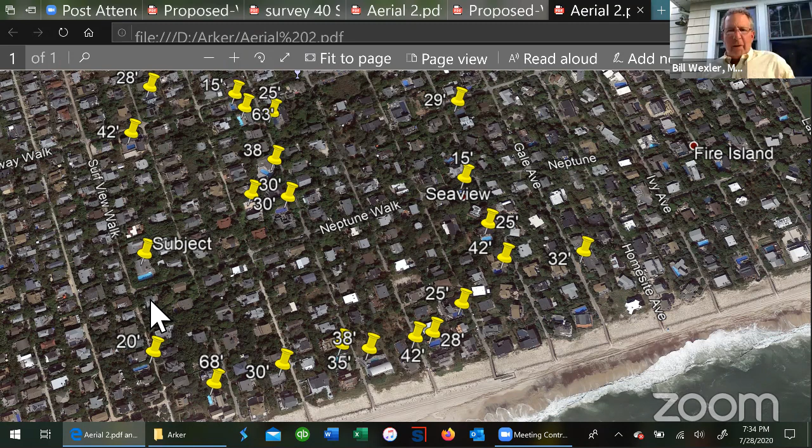Anybody else would like to be heard in this application? There being nothing heard, then I will make a motion. Go ahead. I was trying to save you, Mr. Chairman. Yeah, go ahead. Excuse me, motion to reserve.

Before you reserve, could I ask, you know, we've been working on this project for 1.5 years. It took several months to get the first hearing, several months to get this hearing.

If you reserve on this, this family's going to miss the entire building season. We're only allowed to build September through May here. If you are going to reserve, I ask you to reserve on the pool only, so I have the ability to give this family a new home this fall.

Unfortunately, Mr. Graham, in the 10 years I've been on the board, we've never granted and denied in part. It just becomes too complex to enforce.

So I understand the applicant's needs, but it's just not something we have done. It creates administrative problems for us and the town.

Mr. Graham, if you're willing to listen, we will make every effort to get you a decision prior to the 60 days. We can't make a promise because there are things beyond our control, just like the months we had no hearings were beyond our control. But we'll make every effort.

We understand, thank you very much. And just so the record's clear, the months we had no hearing, it wasn't because we were on strike. It was because of COVID-19. That's exactly right, and it would have been illegal, and we generally don't break the law.

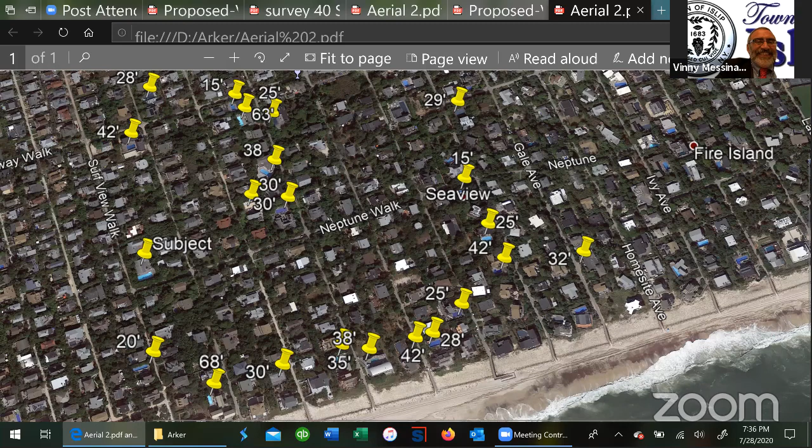All right, next application, number 452-20, Blue Sanctuary. Oh, I wasn't holding... giving up so easily.

I liked having the reins here. Would you like to finish with a flourish? No, no, it's all yours. All yours.

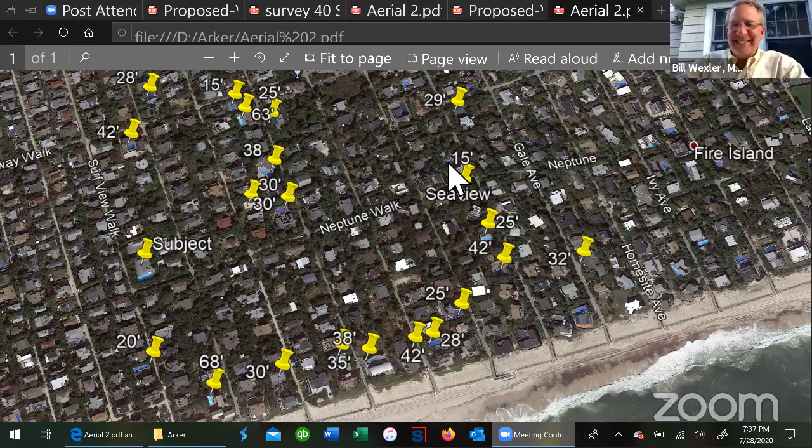Number 452-20, Blue Sanctuary Holding LLC, permission to elevate dwelling, leaving finished first floor elevation of 11 feet instead of the permitted 9 feet, Residence AA District, south side of True Harbor Way, number 38, 785.14 feet south of Oak Neck Lane, West Islip, New York.

Is there anyone here for the applicant? Good evening, Glenn Grammas with Grammas Consultants. All right, Mr. Grammas, the floor is yours, sir. Thank you.

This application is in a FEMA zone AE5. It's going to be a new house. The town code allows us 5 plus 4 feet, which would bring us up to 9 feet.

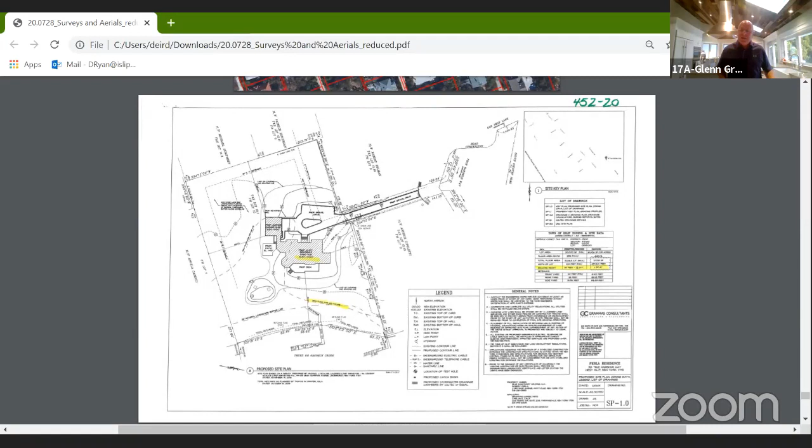To allow the finished floor of 9, we're seeking to go 2 feet higher than that. So the finished floor of this house would be at 11 feet.

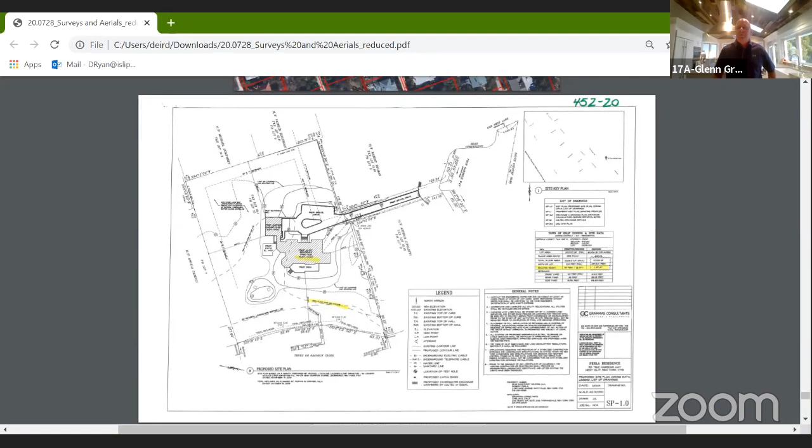If you'd like, I will share the screen again. I have some photographs of the neighbors' homes, and I also have a survey with an elevation of the neighbor's home at 12.4. Going to share the screen.

So you're saying you're still more than a foot shorter than your neighbor, right? Yeah, not only that, we'll also be under the overall height limit allowed by code, so the roof peak will be under the height limit.

Let's see if I can pull up those other photos for you. One sec.

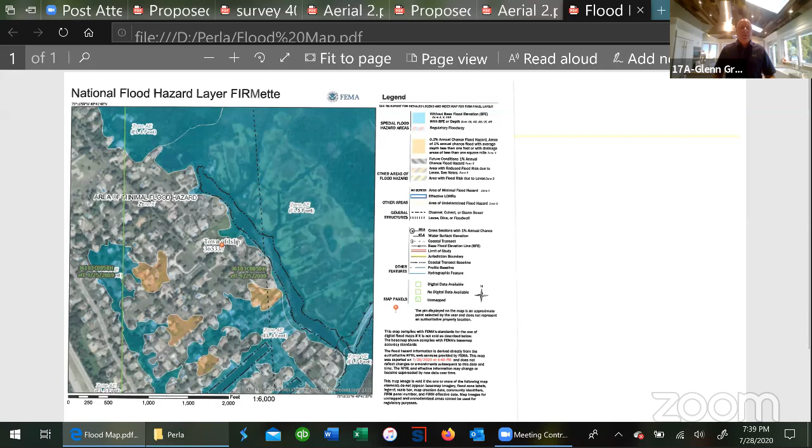So here's the flood map. This subject property is in red. You'll see the AE5 zone takes up about half the property. It goes through the house. And here is some images—actually, I'll pull up the neighbor's survey.

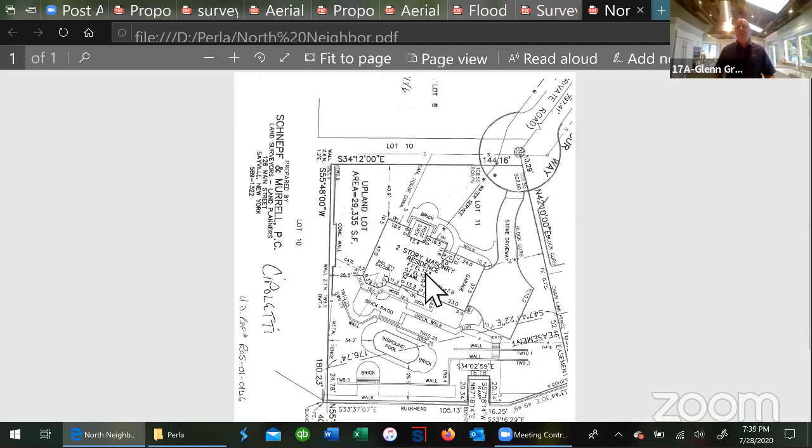That's the subject survey. Here's our north neighbor, Mr. Cipolletti. I believe he wrote a letter in support. He did have some concerns about the condition of the property. Currently it's heavily overgrown with weeds and mosquito filled, and that will be taken care of as soon as all our permits are granted. We can clear the property. But you'll see Mr. Cipolletti's elevation is 12.4. We're going to be at 11.

The last two items I'll show you are just some photographs of where the driveway comes into the property, and this is Mr. Cipolletti's house in the back. You see their property has been filled with retaining walls. We're not planning any retaining walls—there'll be a gentle slope up to the property. There will also be no storage under the house. It's going to have a traditional foundation, not elevated super high.

So all we're seeking is an extra 2 feet here.

Ms. Ryan, anything you wish to be heard on this application? There is no precedent, but as mentioned, it is in a flood zone. I did miss—why is it at 11 and not 9 again? We're just seeking an extra 2 feet to make sure the house does not get flooded in the future.

Having looked at this site a little bit more when I was working with a bulkhead application, it's all marshland, and right now it seems like it would be very prone to flooding. I think as long as—my only concern is that the neighbors to the north, not Cipolletti like mentioned, but the other two—this is previous marshland. Sorry, I'm going a little bit everywhere. No objections, actually. All right, very well. Any questions from the board? No worries, no. All right, no questions from the board.